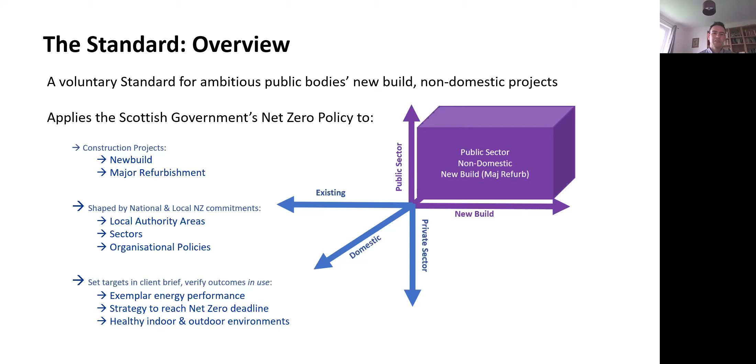The ethos of the standard is that we would set ambitious targets early on in the process, and that applies for energy, for embodied carbon, for other aspects of what we're doing. And as far as possible, we would be looking to verify them in use. And actually, for some of the Pathfinder projects that I'd mentioned, that proved slightly difficult to deal with in the first instance, but all of our teams were very proactive and readily adapted to it.

And that you would be setting a target at a stage where you didn't actually know that much about the building in question. You hadn't done any detailed modelling. You still had quite a lot to find out about it. And those targets are largely based around what's been demonstrated by other exemplar buildings of a comparable type as far as possible. So the benefits of the standard then are that they essentially provide a trajectory to net zero insofar as we know about it at the moment.

So you've all mentioned there in the response to the poll that the route or the road to net zero isn't absolutely clear at the moment in terms of what is required for our new and our existing buildings. The standard seeks to try and address some of that to make sure that what you are doing in your project is ambitious on all of these fronts as far as we can be at the moment. We, as I mentioned, would look to absorb other specific area and local authority requirements into it.

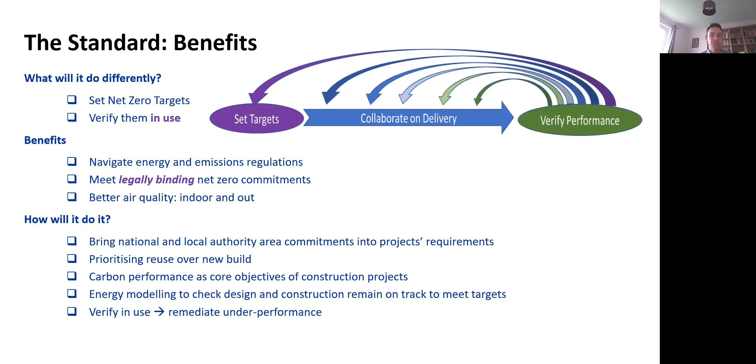It's interesting that some of the features of the standard could propel us to prioritise reuse of buildings over new build, and we'll see how that plays out as the first few standard projects are put into work. And also there's a key requirement for energy modelling, so not just standard compliant energy modelling, but an enhanced suite which allows you to nurse your project towards the targets which you set early on in the project. And again, there's a key requirement here for verification in use, and where that verification can't be met, there's the opportunity to try and fix that later on as well, insofar as it's possible.

So one of the most interesting features of the standard for me is this place aspect, and actually to some extent it's the part I know least about and I'm most keen to learn about. So I'm a mechanical engineer by background and naturally focus on operational energy, but in working with my colleagues at SFT over the last few months, I began to get a better appreciation of this element of it. So this is about making sure that your public sector investment results in the right building, the right place, the right outcomes, and that we avoid wasteful investment.

So there's a few elements to this, and drawing your attention early on to the three priorities of the infrastructure investment plan. So progress towards net zero, place, and inclusive growth. So this aspect of the standard is about trying to capture this very early on, if possible, in a project as well, before any major decisions have been made about place. And we also want you to follow the hierarchy that you can see there. So as far as possible, it's desirable to avoid the actual requirement for a project if we have some of the resources which can be adapted and redeployed already within our estates.

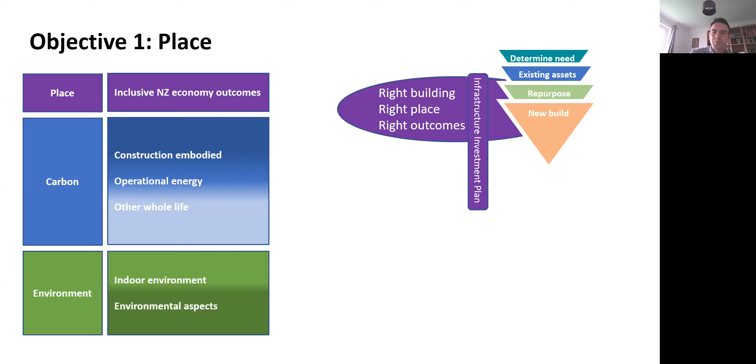So moving on, the part of the standard which I'm naturally most familiar with would be operational energy, but you can see that we've included all the other aspects of carbon in this. So construction embodied carbon, operational energy, and other whole life, which would include the actual carbon associated with maintenance and replacement of equipment over the building's lifetime.

So construction embodied carbon, from the Pathfinder projects that we commissioned, it features very, very significantly. And actually, when we look at the diminishing operational energy emissions factors, in some cases that construction embodied carbon is dwarfing the other aspects of carbon in the building life cycle.

So there's no absolute requirement in terms of regulation for embodied carbon at the moment in the way that there is for operational energy, but we've sought to try and integrate ambitious targets early on in construction embodied carbon, and through the consistent review of a life cycle assessment through the progress of the design, you would look to tighten that up and make sure that you were on the right trajectory.

For operational energy, this was something I had some involvement in at Mott MacDonald, and initially we sought to create a suite of operational energy targets for different building types. In truth, that proved to be really quite difficult, and the significant obstacle there was that there isn't a huge amount of information about some building types in terms of the leading edge of performance.

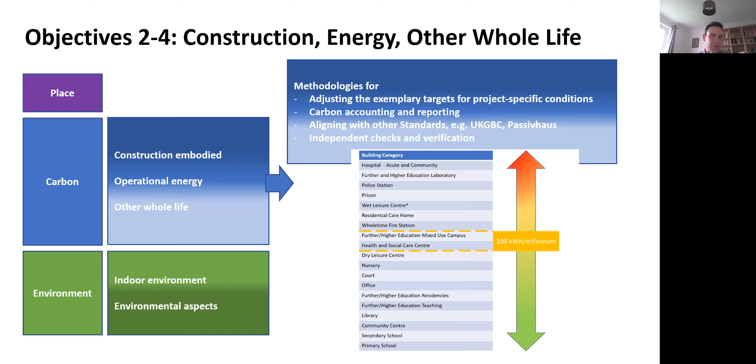So moving on, you can see the final third of the standard is related to environment, indoor environment, and also other environmental aspects. So that indoor environmental performance is very important. We don't want to create buildings which are highly efficient in terms of energy consumption, but are dreadful to work in or to be educated in. And we've set quite high standards within that for a selection of buildings, but we realise that that will require some adjustment depending on the building types that we're considering.

So what we've done is we've created a process that you can follow. And again, modelling features very significantly within this. So there is an interplay between the modelling for operational energy, but also for indoor environment as well. And we have seen the interplay, and in some cases the conflicts between that in some of the Pathfinder projects as well. Again, there's an emphasis on independent check and verification, so post-occupancy evaluation is a very important part of the indoor environment analysis within the standard.

For the wider environmental aspects, those are to a very large extent drawn from the place part of the standard. So we've tried to integrate a good degree of flexibility and project-specific specificity to the environmental aspects. So what you do in the place part of the standard very early on in the project will help determine what your criteria for success will be in terms of those environmental aspects. And that will vary from project to project.

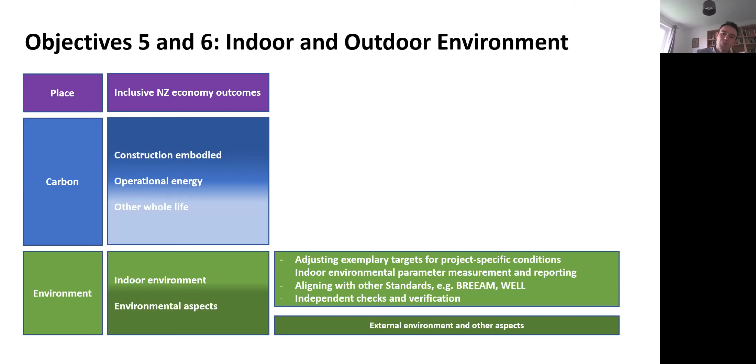In some cases, it may be focused on biodiversity. In others, it may be focused on transport, or other aspects. So moving on, and hopefully that gives you some idea of the structure of the standard and how it is put together.

So early in 2021, and armed with a suite of draft documentation, we had sought to actually apply some of the principles of the standard to a selection of enthusiastic projects of varying size, various stages, various building types.

And at SFT we have a belief that learning through doing is a good way to approach it. So we sought to apply the principles of the standard and essentially see what happened and learn from that, and that helped inform our documentation.

Also, some of the projects decided to go further, so it wasn't the intention in these pathfinders that we would necessarily pull all of the participants right the way through the standard, but all of them were enthusiastic, and some of them have decided to go further with this and would like to apply the standard to the latter stages of the project and its development.

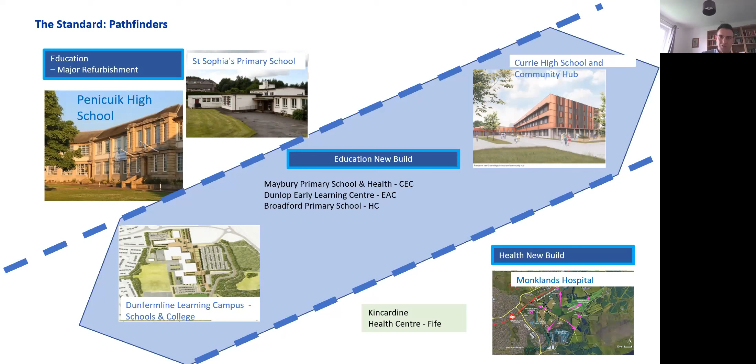So I'll talk now about some of the specific projects, some of the ones that interested me most of all. So St Sophia's Primary School is interesting for a number of reasons, and this was one of the projects which was at a latter stage. Now, this is a refurbishment. It is a refurbishment of an existing 1950s building.

And one of the things that's interesting to me is that the options appraisal early on in this project indicated that there was a really strong desire to keep and enhance the existing building rather than to demolish it and start afresh. That this building was actually a really valuable part of the community and people valued it.

So East Ayrshire Council took a bold step to apply very high energy and environmental performance. And to do that, initially they had applied the EnerPHit standard, which is the parallel process for refurbishment buildings for Passive House. This will be the first EnerPHit school in the UK if it's successful, I believe.

So it fulfilled many of the objectives in terms of place, in terms of meeting with the requirements of the local community, but also these very high energy and internal environmental performances. And one of the side benefits of that is that by following a refurbishment project, they've been able to tweak their potential construction embodied carbon performance.

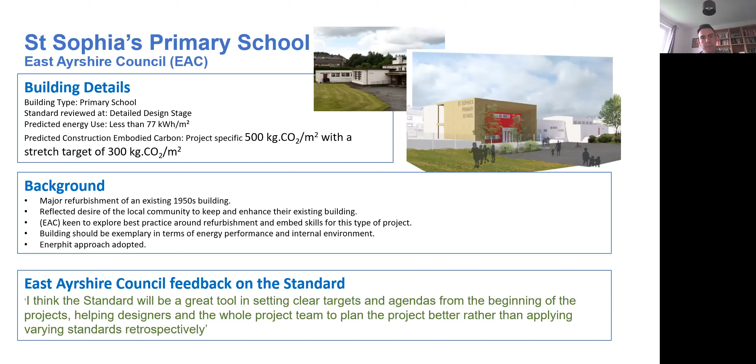So we tailored the performance targets for St Sophia's, and they're actually looking into how far they can go with that now. They've set a nominal target and also a stretch target for the building.

The Dunfermline Learning Campus is another good example. You can see there the very impressive predicted energy use. They're at concept design stage, so they're quite early on in the process. But you can also see there that the project involved quite a good degree of collaboration. So the master plan that drew together the school function, the college function, and also some other community functions for the site was done in collaboration between Fife College and Fife Council.

And in both buildings, they're seeking very high energy performance and embodied carbon performance, as well as creating really good learning environments, and also a joined up approach, which would be quite different from a lot of individual school and college sites.

Penicuik High School is another refurbishment project. You can perhaps tell that refurbishments interest me. And in this case, the building in question is a listed building. So they always knew that they were going to have to retain a certain element of refurbishment. But what was interesting here was that they decided to go a little bit further, or at least are investigating going a little bit further.

They had a stock 1960s type extension to the listed part of their property. They are actually considering retaining that now and refurbishing that to meet the very high environmental and energy performance, as well as the listed building, which they had always intended to keep.

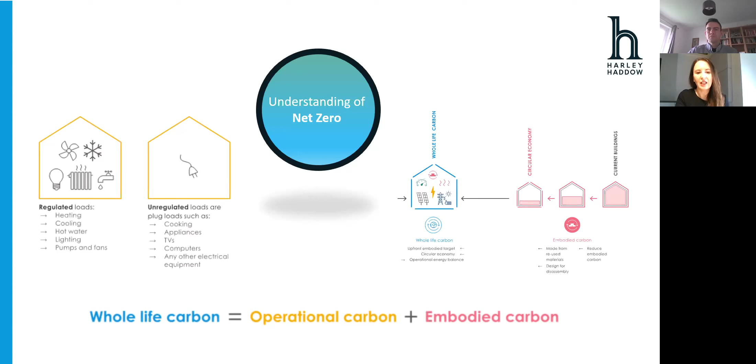Next slide, please, Chetna. We know that we've got a fast-moving environment to net zero, with a number of key changes over the next few years, particularly with our new building stock, where we're starting to move away from gas with the new build heat standard. We've got interim changes to building regulations, Section 6 due for revision next year as a stepping stone to the new build heat standard. We have a number of local planning climate emergencies being declared.

And we also have a number of public bodies aiming to achieve net zero well in advance of the UK and Scottish Government targets. So we really do have a fast moving picture. Those changes will start to move us away from gas, as I said, and we'll really start to design net zero ready and net zero buildings for our new buildings over the next few years.

But we really need to consider our existing building stock, which has a much higher carbon contribution across the UK. And it's really vital that that is considered and plans are put in place now as part of the net zero journey. Next slide, please, Chetna.

So the move away from gas is really down to a decarbonising electrical grid. In the UK, we are producing electricity more and more through low and zero carbon technologies, particularly wind turbines with our offshore wind. And we have a clear path for our grid electricity to be net zero. 2050 is the date they're targeting, but in Scotland and across the UK, it's potentially well in advance of that.

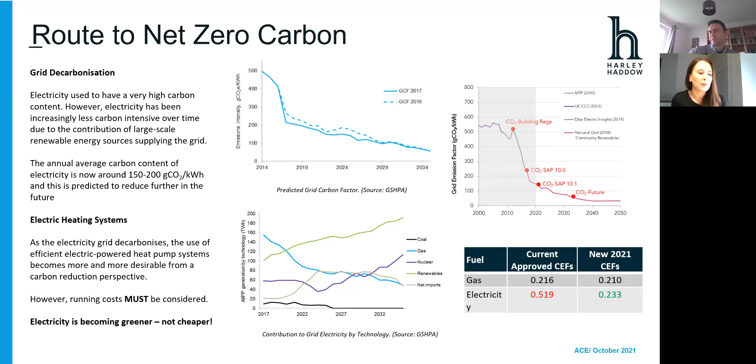With the grid decarbonising, we're essentially asking to design in nearly zero or net zero ready buildings. So what we're trying to get people to do with our building stock, new and existing, is to design something that works away from fossil fuels and gas. But we need to make sure that the energy is reduced. We need to consider how this can also be feasibly achieved, particularly within existing building stock, which have traditionally been on gas boilers, some oil, LPG, for example, even, and look at the full impact of an electrical solution.

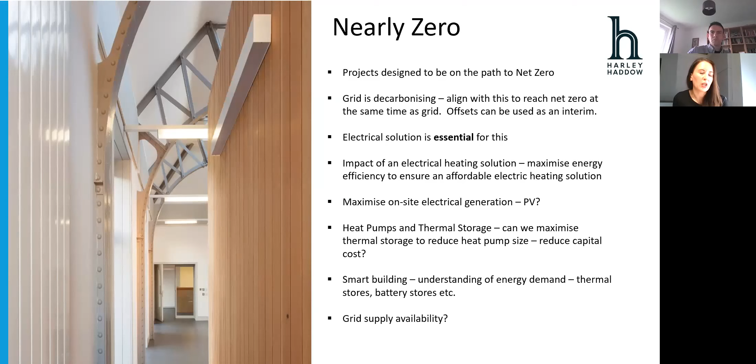With existing buildings, that is much more complex. It can be much more complex, particularly when we're trying to integrate things like heat pump technology. We also need to consider the actual grid supply. Government is asking us to move to electrical infrastructure, which in some cases might not be quite there yet. So we all need to consider that as part of this journey and part of the appraisals that we're carrying out. Next slide, please.

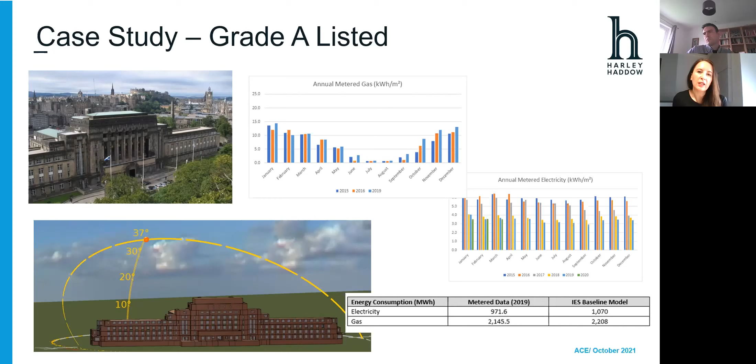So we've got a couple of case studies here where we've started to look at, for our clients, a route to net zero with existing building stock. We have St Andrew's House, which is a Grade A listed building in the centre of Edinburgh, which is at the moment gas boilers, targeting to be net zero carbon by 2030.

Next slide, please. We also have the National Galleries, again in Edinburgh, which is the National Galleries estate. So we're looking at a number of buildings within their estate to try and pass a route to net zero for them. Now, both these projects have fairly complex buildings with specific demands. Obviously, Grade A listed for St Andrew's House. National Galleries not only have historic buildings, but they also have particular requirements in how they run the buildings, with trying to keep temperatures within set points and limiting the environmental conditions.

In both cases, what we have done is we have developed a digital dynamic model of the baseline of what their current energy and carbon demands are. And using IES, dynamic simulation software, we've replicated the current building energy and carbon, and we've then aligned it with the actual metered data. So this gives us a really accurate picture of what each of these buildings are doing in relation to energy, the uses of the space, the demands to each space. So we've got a very accurate baseline that we can start to measure savings against.

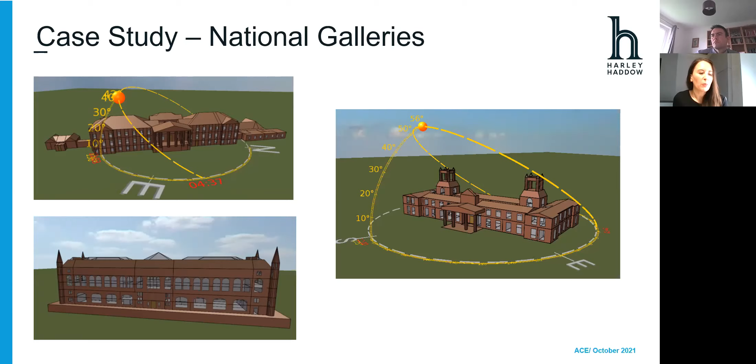We can then start to appraise and review a short list of feasible options. Now, these may vary from building to building, and we're using an energy hierarchy. Next slide, please. So it's trying to shortlist what options are viable. Now, as I said, not every building will have the same option, and it's really critical that we look at them in isolation and then start to look at an estate-wide approach.

So using the Fabric First energy hierarchy, which I'm sure you're all aware of, what opportunities do we feasibly have to improve the building fabric levels? Where we've got historic buildings, we may be quite limited, but there's usually something that we can do. We then can look at things like energy efficiency savings, so things like heat recovery, ventilation, lighting. Is there anything we can do with the control and management of the building and set points?

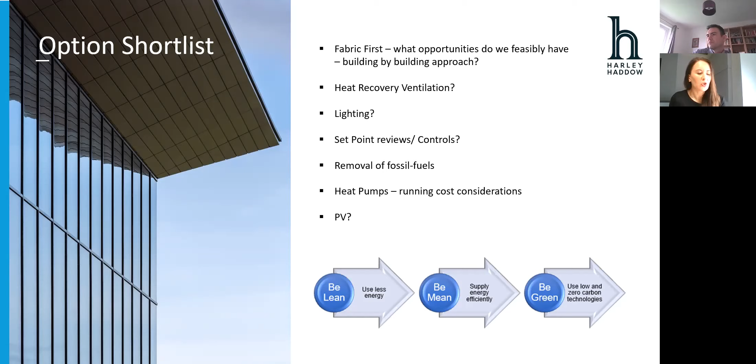And once we've exhausted all of those elements, we start to look at the removal of fossil fuels and the viable solutions of the main energy solution and demand for the building. But we obviously have to create the shortlist first. It has to be this holistic approach. Next slide, please.

So looking at this multi-level approach, we can do this on a building by building basis, or we can do it on an estate-wide basis as part of a master plan. And we can start to track each of the model's options using the dynamic simulation software. Critical to this is making sure we've got that digital twin, if you like, the baseline existing model that's the accurate measure, so we can really get an idea of what each of these savings are, and then start to quantify which ones will give the best savings. And this can form part of the overall review of the estate or the buildings, working towards this end goal for net zero.

Now, we've got potentially methods of offsetting towards the end there. So there's so much we can achieve on site, and there's offsetting. However, offsetting should only be used as a short-term goal to try and offset the remaining carbon on a project. We really need to get our buildings net zero ready and make all these interventions first. And it's really important that we start to look at each of these so we can measure capital cost outlay on top of things like energy, carbon, and running costs.

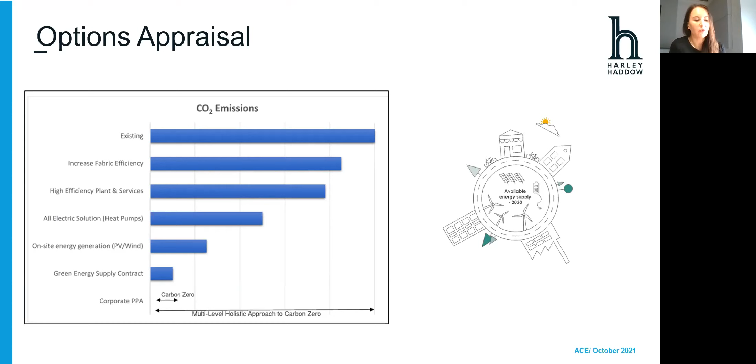Next slide, please. So this is one of the examples we did in one of the buildings for National Galleries, where we've got the model, where it's the baseline, we've compared it with the actual meter data, and we have a very close model where we're within 0.2% of the actual metered use for gas and just over 1.5% electricity. And this is all the energy demand in the building. So this is regulated and unregulated loads.

We can then transpose that to carbon, so we get an idea of the current carbon impact, and look at the changing grid. So look at the carbon emission factor for electricity as it starts to change. We can then measure each of those options, so working through the fabric options 1 to 5, look at energy savings options, option 6, and then once we've exhausted those elements, move away from gas. And in this case, we looked at heat pumps and potentially PV. So we've got an overall saving with a palette of measures and interventions of just over 35%.

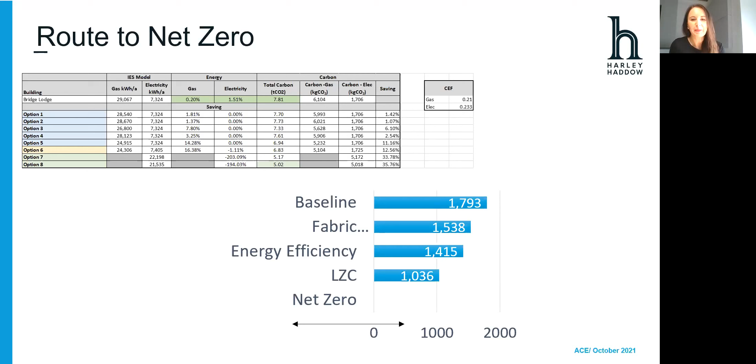We can then start to review the impact of the grid decarbonising. Next slide, please. So once we've made all those interventions, we have a carbon impact for each building and an estate-wide. But because we've moved away from gas, because we've made energy efficiencies to make sure that heat pumps are an efficient solution, we can start to see the full impact of the grid decarbonising.

So we start off there at the top with just over 1,000 tonnes of CO2. But as we move through the grid decarbonisation effect, by the time we get to 2050, we should be at zero. But as I mentioned before, it's not just a case of moving on to an electrical solution and waiting for that grid effect to take account. We need to make sure that we're giving our clients buildings that they can afford to operate and run.

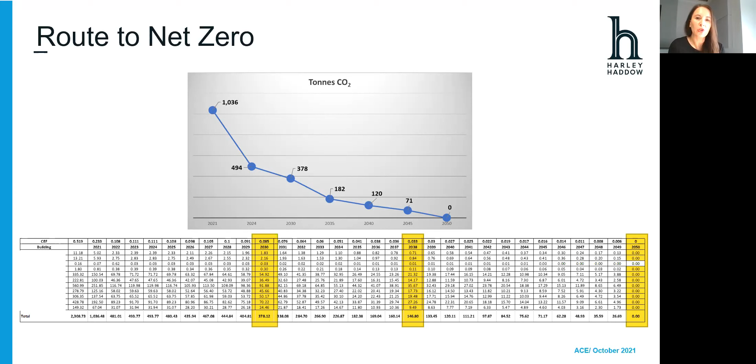Next slide, please. So as part of this, we've also developed some bespoke modelling reviews. We understand that capital cost investment for things like heat pumps are very high, and we need to ensure that this will work within our existing building stock. What we've done is we've taken the results from our dynamic modelling, and we've started to look at it in detail. We've started to see what the actual energy demands are, look at the peak demands and heating.

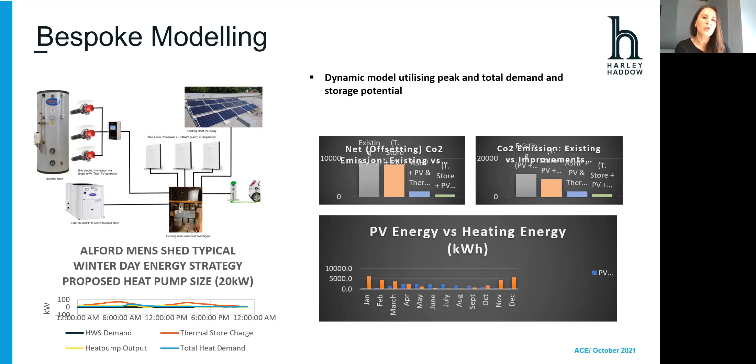We did this, for example, for St Andrew's House, which currently has over a megawatt heating demand. With the fabric improvements, we took that down to 800 kilowatts. But as part of this review and bespoke modelling, we started to look at the sizing of the heat pump and the use of thermal storage to try and reduce the heat pump size down as much as possible.

Next slide, please. We also had to look at the current heating study for the building. So heating within existing buildings is generally on higher temperature based on a gas boiler. So your heat output is based on an 82/71 flow and return temperature. That is not necessarily compliant with a move to a heat pump, which works on much lower flow and return temperatures, so 55/40.

So as part of our dynamic review, once we've looked at the carbon impact, once we've looked at the bespoke modelling and heat pump sizing, we also look at the heating distribution within the building. Do we have the heat emitters and pipework circuits that can actually accommodate a lower flow and return temperature? So we carried out a study for a typical floor. We looked at the existing heating output. We looked at the impact of reduced heat demand through fabric improvements, and then looked at potential shortfall for reducing the flow and return temperature, to see, do we need to strip out the existing heating circuit and radiators and start again, or can we reuse?

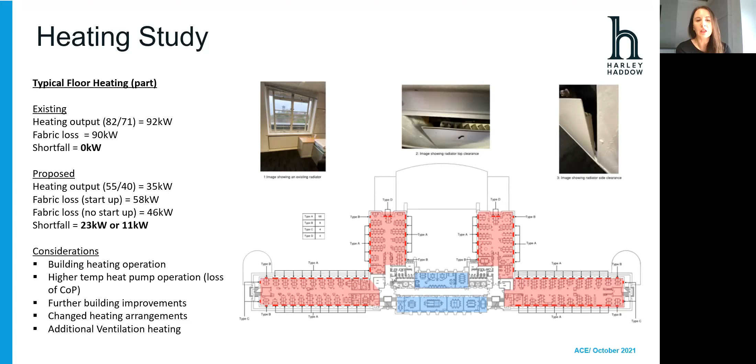Is it something where we need to look at higher temperature heat pumps, which obviously has an impact on performance and efficiency and therefore running costs? Or can we make further improvements? Or add in supplementary heating. And for St Andrew's House, we found that we had obviously reduced the fabric loss down. However, there was still a small shortfall, whether we looked at startup or not startup, and that still needs to be supplemented. And that needs to form a key part of the review when we're carrying out these net zero studies. Next slide, please.

And finally, we also really need to consider the potential overheating risk. We are asking to make these fabric improvements to our buildings. We're trying to make them more airtight, to reduce energy, to make these net zero solutions more cost effective and technically feasible. But at the same time, we have the impact of climate change. Our climate is changing, the external temperatures are getting higher. So we need to make sure that with every solution we're putting forward, we're not creating more problems for ourselves.

So what we've done here is we've reviewed the internal temperatures with the changes of fabric, with the increased airtightness levels, to see if we would actually end up having a negative impact on carbon, so potentially increasing our cooling demand across the year. We found in this case that although there was a peak increase, the fact that we're starting to look at potential ventilation strategies, one for carbon reduction and two as part of the COVID ventilation review, that was mitigated.

So the actual overheating risk was mitigated. But it really has to be a full holistic review when we are considering these elements, particularly for existing buildings, because it isn't just a case that we can plug in a heat pump and get on the road to net zero. We need to consider all of these elements, and they all need to be considered very early on. And the point of using dynamic simulation modelling is that it allows us to do that with quite a degree of accuracy, so that we are presenting an achievable solution to our clients.

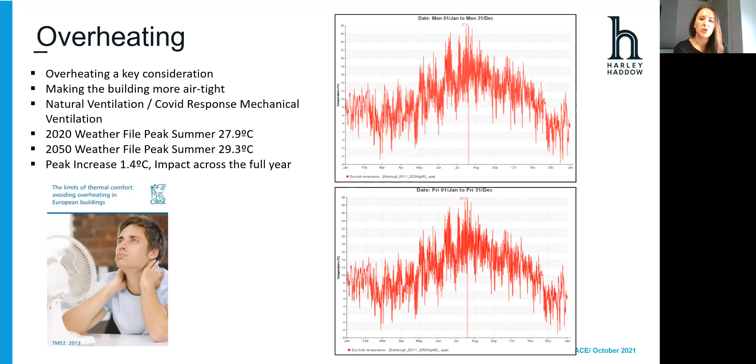And I guess it'd be interesting, given most of the people watching today didn't have a great faith in the two heat and building strategies coming out, to hear what people would like to see in those.